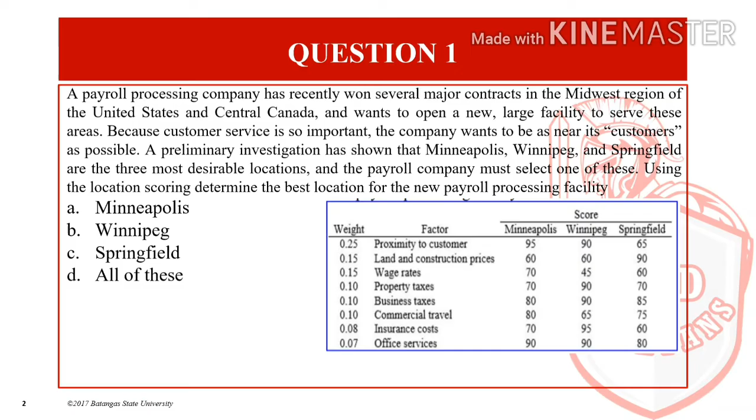So ang gagawin lang natin is i-multiply natin yung weight dun sa score ng ating tatlong alternative or location. So for Minneapolis, multiply natin si 95 times 0.25. So yung factor na yun is the proximity to customer and also yung other factors. Then kukunin natin yung summation.

So, ang summation ng Minneapolis is 78.15, then ang kay Winnipeg is 76.65, and kay Springfield is 72.15. So, since ito ay score, kung ano yung pinaka mataas na score, yun yung ating pipiliin. So, for this particular problem, ang pipiliin natin ay yung Minneapolis with 78.15 kasi siya yung may highest score.

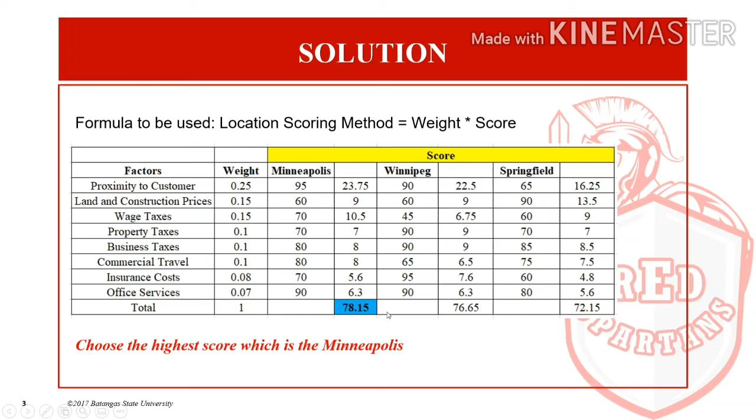The next, question number 2. Belinda Fashion Wear is a small chain of stores specializing in fashion clothing. The company recently has 5 stores in Manila, Quezon City, and Caloocan, and it wants to open new stores in 4 new mall locations in the other nearby cities. A consulting firm has been hired to help the company decide where to locate the new store.

The company has indicated 5 factors that are important to its decision, including proximity of a college, community median income, mall vehicle traffic flow and parking, quality and number of stores in the mall, and proximity of other malls or shopping areas. The firm had the company weigh the importance of each factor.

The consultant had visited each potential location and rated them according to each factor. So ito yung ating location factor and also yung weight per each factor and yung ating 4 na location, mall 1 to mall 4. Given that all sites have basically the same leasing cost and labor and operating costs, what is the recommended location based on rating factors or yung location scoring method? So yung formula lang natin, i-multiply natin si weight dun sa score ng kada location.

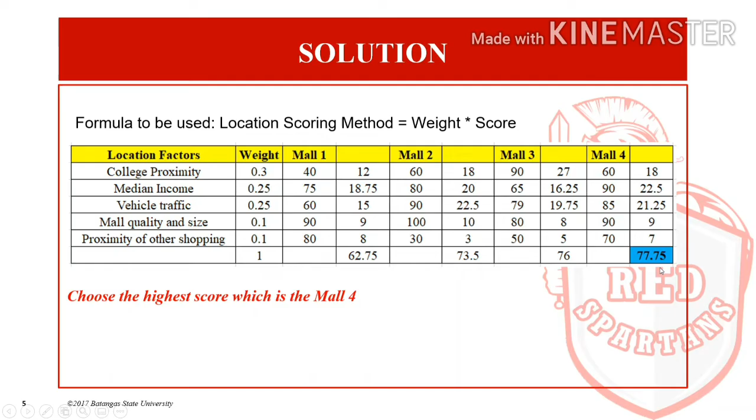So ito yung ating solution. So yung mall 1, merong summation ng weighted score na 62.75, and si mall 2 merong 73.5, si mall 3 76, and si mall 4 77.75. So pipiliin natin yung highest score, which is mall 4. So yun yung ating best location. So answer natin for question number 2 is letter D.

The next, question number 3. The Inah Burger restaurant chain uses a distribution center to prepare the food ingredients it provides its individual restaurants. The company is attempting to determine the location for a new distribution center that will serve 5 restaurants. The grid map coordinates of the 5 restaurants and the annual number of 40-foot trailer trucks transported to each restaurant are as follows. So yan, yung ating X and Y and also yung ating annual truck shipment per restaurant.

So determine the coordinates of the location using the center of gravity method. So parang kukunin natin dito is the center or yung midpoint. Yung midpoint formula or meron tayong center of gravity method formula. So ano ba yung ating formula? For x is equal to summation of x sub i times w sub i over the summation ng w sub i or yung ating weight. Then for y, summation of y sub i multiply sa w sub i over summation ng w sub i.

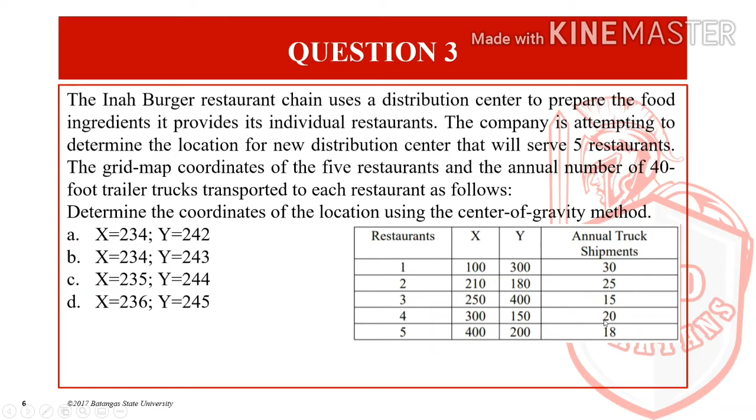So for x, i-multiply lang natin yung score. Yung andito, yung 100 multiply sa 30 plus 210 multiply sa 25 plus 250 multiply sa 15 plus 300 multiply sa 20 plus 400 multiply sa 18 over sa summation ng ating weight or the annual truck shipment. So ito yun. Then lalabas ng ating x is equal to 233.33 or round up equal to 234. So yun yung ating x coordinate.

And for y, substitute lang din yung ating y and yung weight. So ang makukuha nating value ng y is equal to 241.67 or equal to 242. So yung x and y coordinate natin or yung center of gravity is equal to 234 and 242. So answer natin is letter A for question number 3.

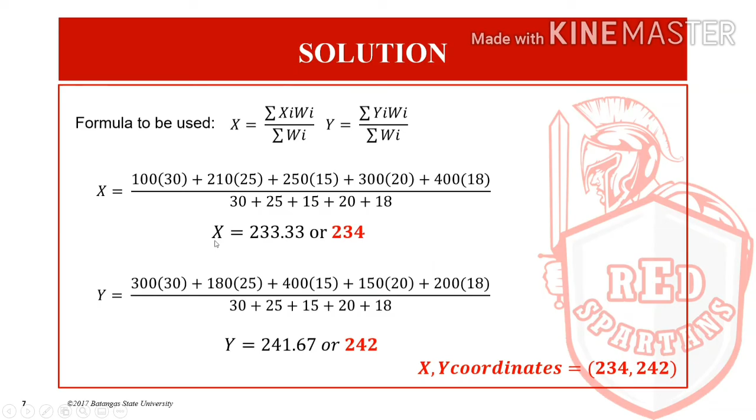So for question number 4, the Yuan Homes, a home improvement supply chain, is going to build a new warehouse facility to serve its stores in 6 Metro Manila cities: Taguig, Pasig, Mandaluyong, Makati, Pasay, and Quezon City. So the coordinates of these cities in miles using Manila as the origin of a set of coordinates and the annual truckloads that supply each city are shown in the table below.

So ito yung ating table. Pasig, Taguig, Mandaluyong, Makati, Pasay, and Quezon City. So the company has 2 parcels of land, site A and B. Ito yung ating site A and B. And yung kanyang coordinate, X and Y. So use the load distance technique to determine which would be the best site with its load distance value. So alin ba yung best site natin? A ba or B? So using load distance technique.

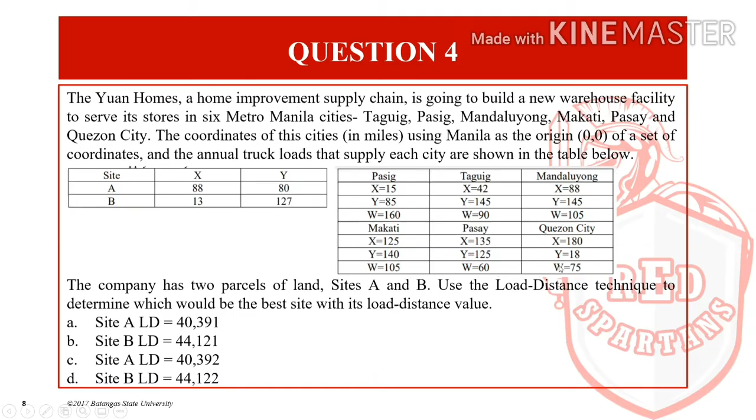So, ano ba yung ating weight? For Pasig, ang weight natin is 160. For Taguig is 90. For Mandaluyong is 105. For Makati is 105. For Pasay, 60. And for Quezon City, 75. So, multiply lang. Then, lalabas ng ating load distance for site A is 40,391 and for site B is 44,121.

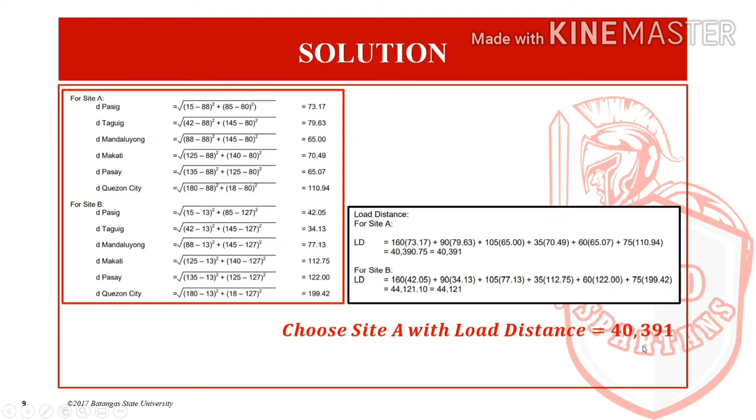So for question number 5, Mark Carlo Cases is an exclusive producer of handcrafted stylish cases. Priding itself on its earlier reputation, the company assembles each case with care and attention to detail. This laborious process requires the completion of 6 primary work elements which are listed below. So the tan leather, then the dye leather, shape case, molding, install and fix, and also the assemble. Yun yung ating work element. So if the demand is 60 cases per 40 hours week, compute the cycle time for this process.

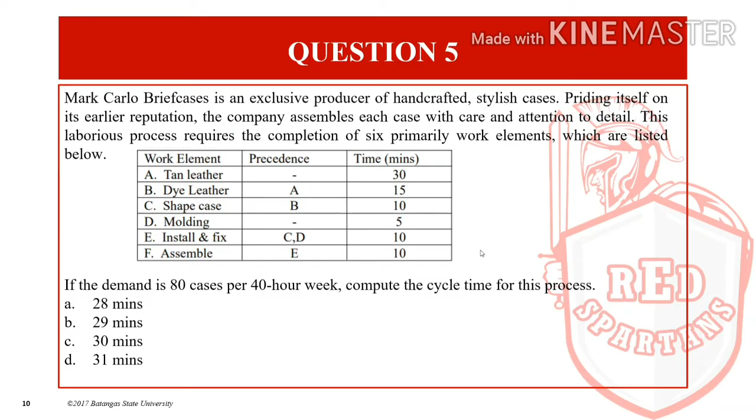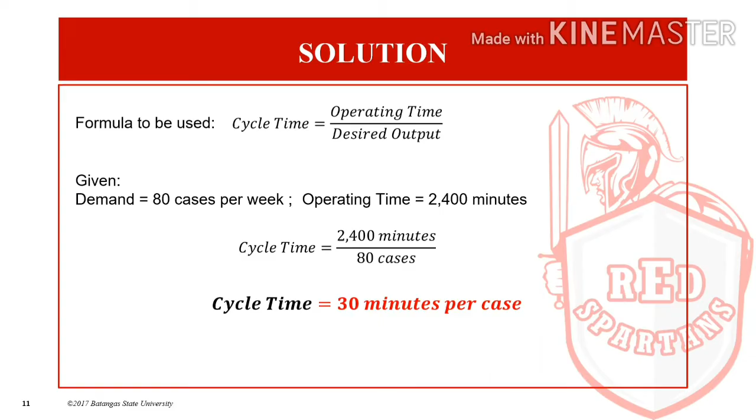So ano ba ang formula natin to determine cycle time? So to determine cycle time, yung formula natin is the operating time over the desired output. So i-change muna natin yung time na 40 hours per week into minutes. So 40 hours times 60 minutes per hour is equal to 2,400 minutes. So yun yung ating operating time. I-divide natin sa 80 cases. So ibig sabihin yung ating cycle time is equal to 30 minutes per case. So letter C.

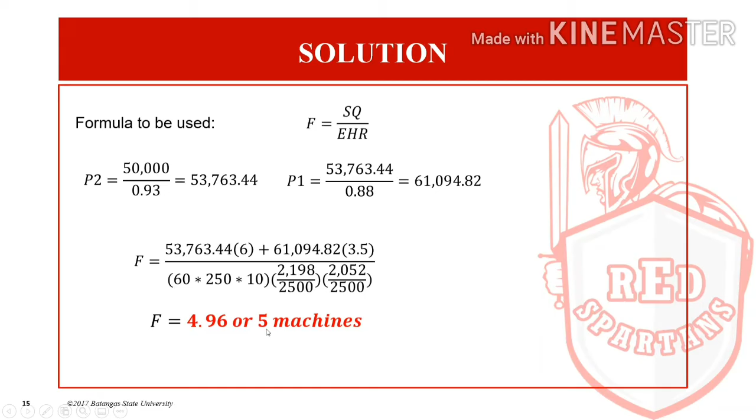So, letter B. For question number 8, Eric Explosives Company is considering the expansion of a solid propellant manufacturing process by adding more 1-ton capacity curing furnaces. Each batch, 1 ton of propellant must undergo 30 minutes of furnace time, including load and unload operation. So the required output for the new layout is to be 16 tons per shift. Then plant efficiency is estimated at 50% of system capacity. So determine the number of furnaces required.

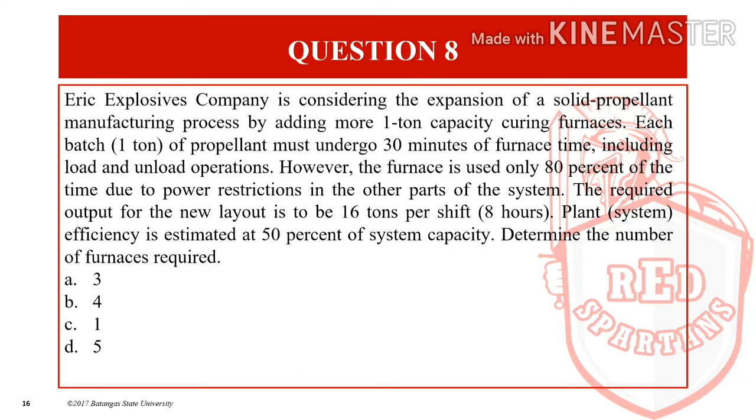Then question number 9. So Dennis Furniture Company manufactures 4-drawer cabinets in 6 stages. In the first stage, the boards forming the wall of the cabinet are cut. In the second stage, the front drawer panels are woodworked. In the third stage, the boards are sanded and finished. In the fourth stage, the boards are cleaned, stained, and painted with a clear finish. In the fifth stage, the hardware for pulls, runners, and fittings is installed. And in the final stage, the cabinets are assembled. Inspection occurs at each stage of the process, and the average percentage of good quality units are as follows.

Ito yon. In each stage, meron tayong percentage ng good quality. So the cabinets are produced in a weekly production run with a product input of 300 units. Determine the weekly product yield of good quality cabinets.

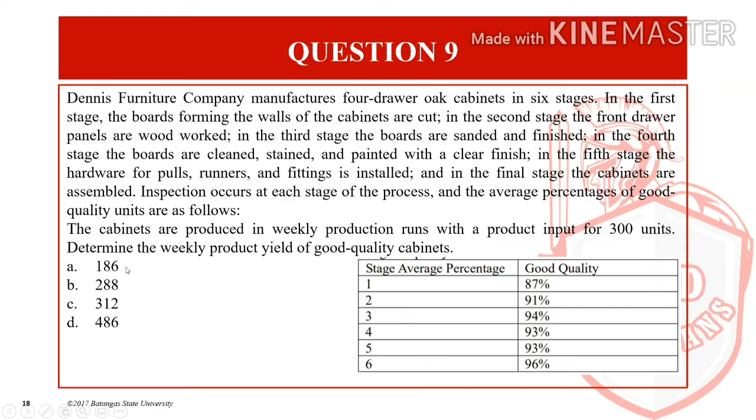So for question number 10, what weekly product input would have to be achieved for a final weekly product yield of 300 cabinets? Ano naman daw yung ating input para magkaroon tayo ng product yield na 300 cabinets? So kung yung ating percentage kanina ng stage 1 to 6 ay eto.

So ang gagawin lang natin, babaligtarin natin. Yung yield or good quality unit is equal to input times the percentage of good quality unit. So dito yung 300, then kukunin natin yung input. Then lalabas dyan is 486 cabinets. So ibig sabihin, mas mataas naman sa 300. Kailangan natin ng 486 cabinets na input para magkaroon tayo ng product yield na 300 units. So answer natin is letter D for question number 10.

So for question number 11, the Jelo Motor Company, motors are produced in a 3-stage process. Motors are inspected following each stage with percentage yield of good quality in-process units as follows. Stage 1 to 3 with the average percentage of good quality. So the company wants to know the daily product yield for product input of 250 units per day. Kung hahanapin natin is product yield, so dapat less than 250. So remove na natin itong A sa pagpipilian at saka yung D. It's either B na 238 or C na 223.

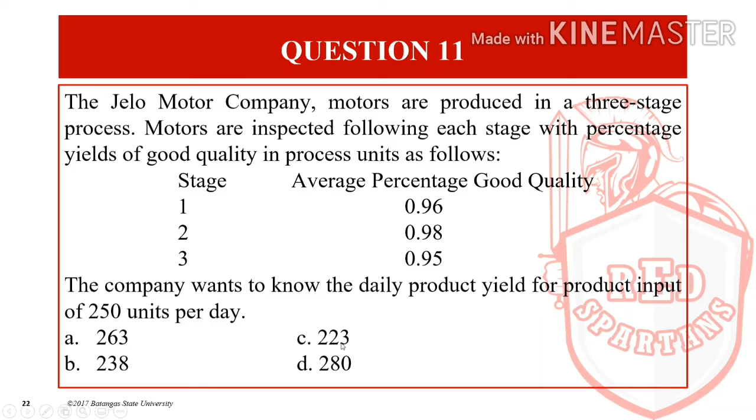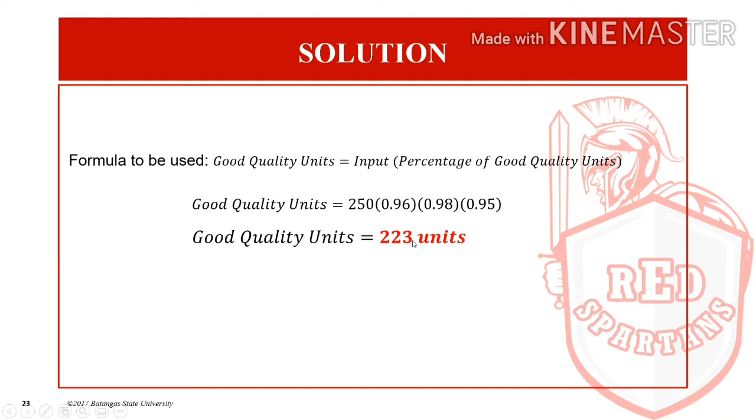So 250 na input multiply sa 0.96 multiply sa 0.98 times 0.95. Then yung ating daily yield or good quality unit is equal to 223 units. Answer natin is letter C.

Then question number 12, how many input units would it have to start with each day to result in a final daily yield of 250 good quality units? So ano naman yung ating input para magkaroon tayo ng daily yield na 250? So ganun din ang gagawin natin.

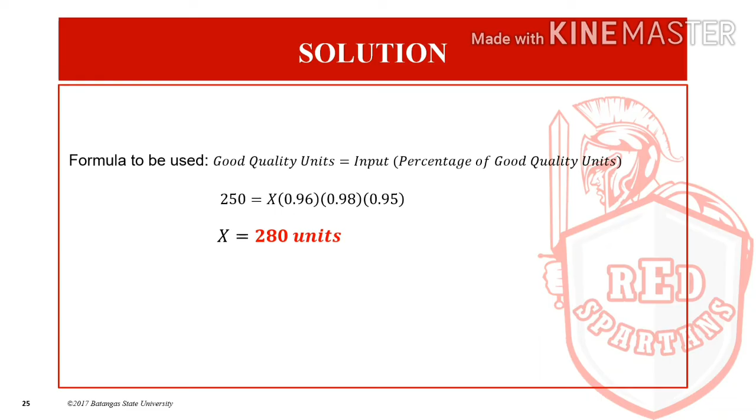250 is equal to X, which is the input, times 0.96 times 0.98 times 0.95. Ibig sabihin yung ating X is equal to 250 over dun sa ating percentage ng good quality ng stage 1 to 3. So lalabas dyan ang ating input is 280 units. Kailangan natin ng 280 na input para magkaroon tayo ng 250 na daily yield. Answer natin is letter D.

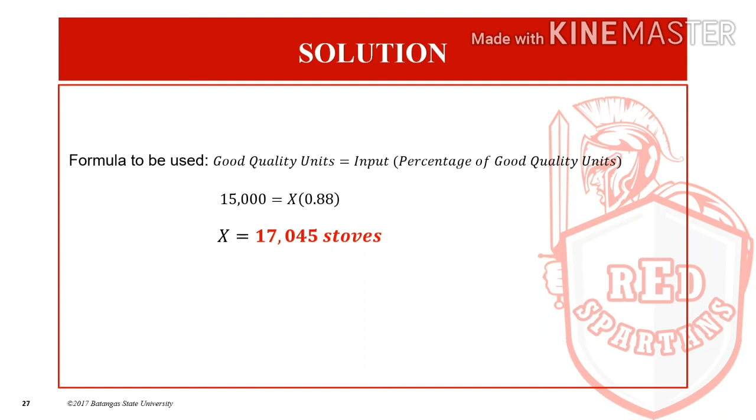So question number 13. Rafael Metal Company manufactures wood burning stoves. What is the product input for 15,000 stoves if the good quality of each stove is 88%? So kinukuha natin ay product input. Formula natin, good quality units equal to input times the percentage of good quality units. So 15,000 is equal to X times 0.88. Didivide lang natin yung 15,000 sa 0.88. Then lalabas ang ating input is equal to 17,045 stoves para magkaroon tayo ng yield na 15,000 stoves. So answer is letter D.

So for question number 14, Lara Company operates a small telephone order system for a catalog of its clothing products. The catalog orders are processed in 4 stages. Errors can be made in orders at any of these stages, and the average percentage of errors that occur at each stage are as follows. If an average of 460 telephone orders is processed each day, how many errorless orders will result?

Meron tayong 4 na stage, then yung percentage ng error. Huwag kayong malilito kasi ang given natin ay percentage ng error, hindi percentage ng good quality unit. So ang kukunin muna natin is the percentage ng good quality, which is 1 minus the percentage ng error. Ibig sabihin, sa stage 1, meron tayong 0.81 na percentage ng good quality or 81%. Stage 2, 0.84 or 84%, stage 3, 90%, and stage 4, 92%.

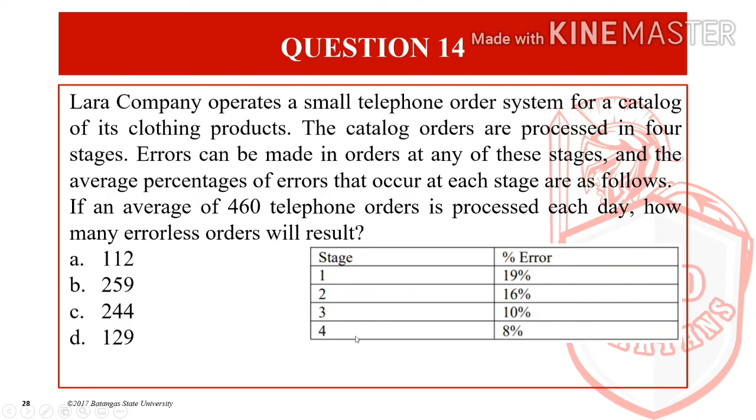So formula natin, yield is equal to input multiply sa percentage of good quality units. So 460 times 1 minus 0.19 times 1 minus 0.16 times 1 minus 0.10 times 1 minus 0.08 is equal to 259.15 or 260 telephone orders. Answer natin is letter B, 259 or 260.

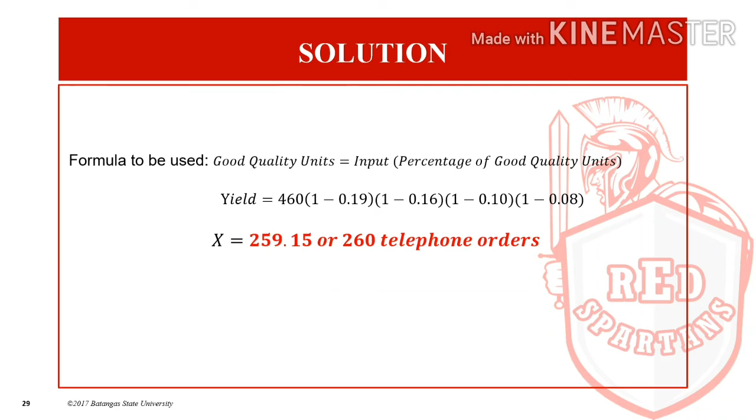So yan yung ating mga problem for facilities planning and design. Ang kailangan lang nating matandaan is the factor rating method. Kapag factor rating, yung highest score ang pipiliin natin. Kapag center of gravity, kukunin natin yung x and y coordinates. And kapag load distance naman, yung pinakamaliit na distance.

Then yung ating yield, na aral din natin dun sa module 3. So yung good quality units is input times the percentage of good plus input times the percentage of defective times the percentage of rework. Pero dito naman ay madami tayong stages or maraming percentage ng good quality.